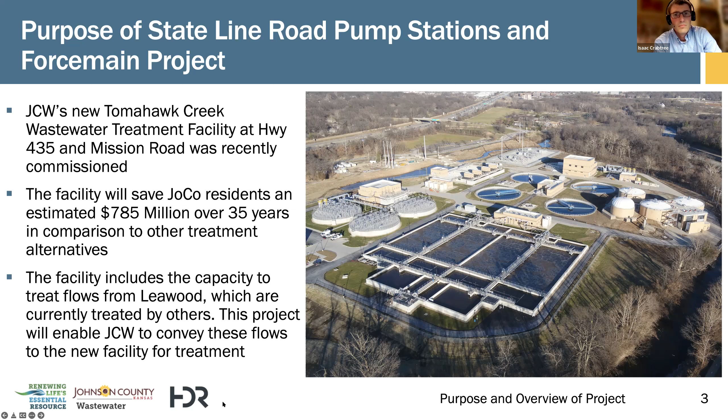So I'll get into this in a minute, but this project is going to end up intercepting flows at those locations, with the exception of number 12, and pump flows from there down to our new treatment plant, so that we're no longer sending dry weather flow to Kansas City, Missouri.

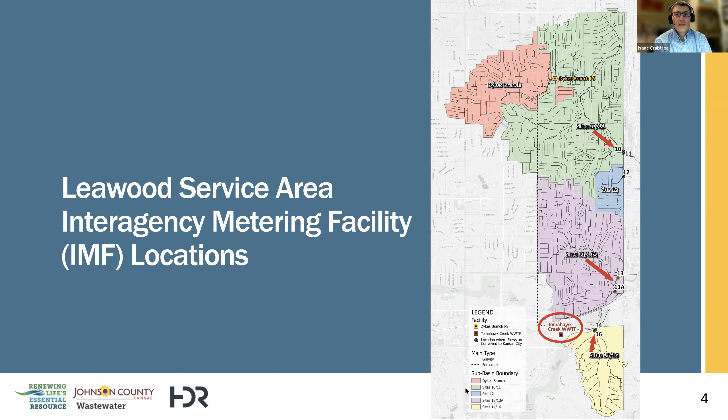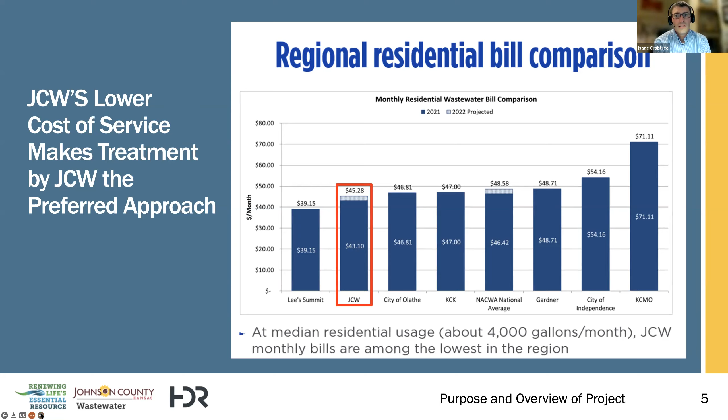It's not by accident that we have low rates. We have been proactively seeking out projects like this to save our ratepayers money, and that's one of the reasons why we can keep our bills as low as they are. If you want to go to the next slide, in actually looking at these particular pump stations, we're projecting that over the next 20 years we can save around $100 million by disconnecting those IMF sites and pumping the flow to our new treatment plant.

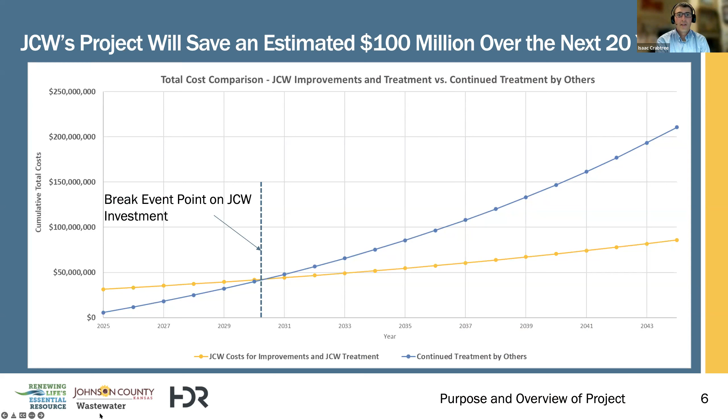And it will collect sewage from the sewers that cross under the state line at that point, and it'll pump it down a force main that goes along State Line Road down to 103rd Street, where it'll intercept flows from that pump station that we're going to be talking about tonight, which is, like I said, south of Gates Barbecue, just north of Indian Creek. And then together, those force mains will be combined and will be pumped across 435 through Leawood City Park, and eventually onto the Tomahawk Wastewater Treatment Facility.

There is one more pump station, the pump station 14/16, which is just to the south of College, right next to the Hallbrook Golf Course. There's a restroom facility that you may be familiar with if you're familiar with the golf course, between holes 18 and 16, I believe. That pump station will take flow from Hallbrook and pump it into the same force main with the others to the treatment plant.

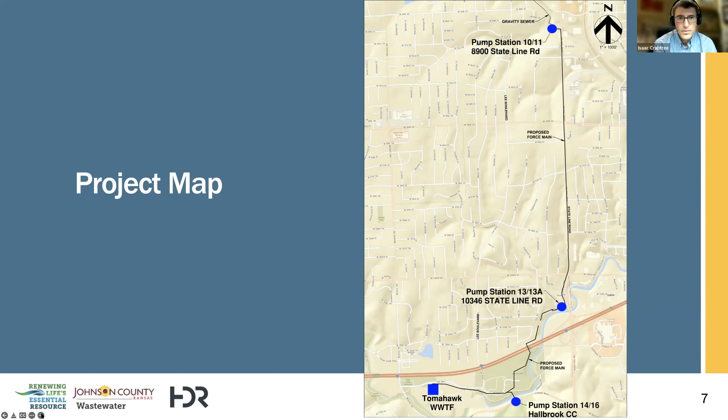So that's kind of a general overview. We've got 3 pump stations, we've got a force main, and all of it will take dry weather flow to the Tomahawk treatment facility there just to the west of the park. I think that was all I was going to present. I'll hand it over to Ron. Ron's going to go through some more of the technical aspects of the pump station.

Right, thanks, Isaac. Yeah, so I guess the question would be, why are we here tonight? And like Isaac was discussing, we've got this big project coming down here on State Line Road. We got this pump station that we're proposing. We have made a submittal to the city of Leawood, a preliminary development plan. So we've developed a concept to move this forward, to eventually go into final design once we get approval through the city.

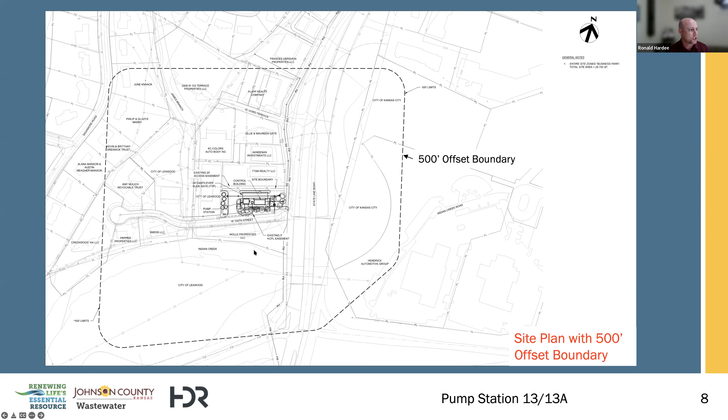As part of that process, we are required to do an interact meeting to reach out to the public, gather any comments or questions and get those addressed prior to the Planning Commission meeting, which will be on March 22nd. And so we've highlighted here on a site plan, we have to reach out to 500 feet beyond the boundary of the site itself.

And as Isaac noted, kind of the key location marker for this site is the Gates Barbecue. And then we're just north of the Indian Creek and the old Leawood Public Works facility. And there's actually an existing building at this site, and we will be demoing that building and constructing this new facility. So next slide.

Well, and Ron, I'm going to interrupt you just for a second. We got a question from Lewis. Yes. Mr. Nerman wanted to know what the taxpayers paid to construct the plant at Tomahawk, kind of going back to Tomahawk there. What did the taxpayers pay for the construction of the Tomahawk facility? That actually might be a better question for Mr. Kalis if he's on the phone.

I didn't work on that project, me personally. It's a Johnson County project. Was it around 250 million construction cost, Mike? We may have lost Mike. I think it was around $250 million. I'm here, Isaac. I couldn't find the unmute button.

Okay, sorry. First of all, the taxpayers paid $0. It was all financed through sewer rates. The total project was about $340 million. The construction of the plant itself was $260 million. And you may have noticed if you drive by, they actually had to fund the construction of an Evergy substation next to it to not only provide the plant, but strengthen the whole electric grid down through that area. And the rest were other associated costs for engineering and administrative costs and so forth, but 340 million in all out of sewer revenues.

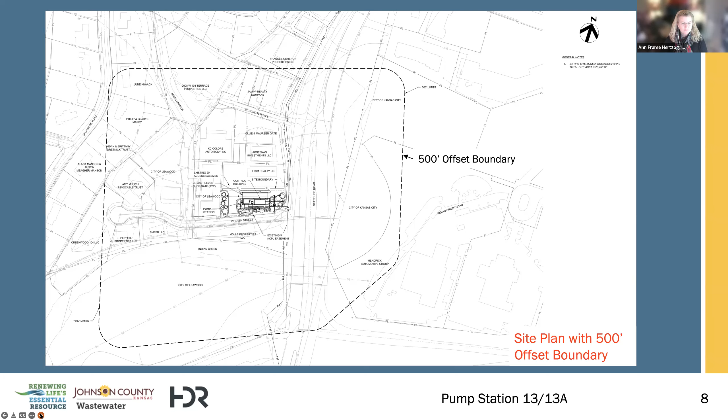Okay. So then this just shows a blown up view of the pump station site itself. So this property, we'll be platting it along with the preliminary development plan. The pump station building itself will sit 40 feet off of the right-of-way line, meeting all the city setback criteria. And then we're just trying to show at grade, the control building and pump station will be all you'll see at grade. There'll be a screening wall that you can see from 104th Street. We'll have a rendered image that will show the site as well at the end here, but trying to get a little more into the technical side.

So we'll have to reroute some gravity sewer lines in this area to get them over to the pump station. Then once it goes through the pump station, it will have a little force main that will tie into that larger force main that Isaac was noting coming from the north, heading on down to the south and west to the Tomahawk facility. And then there's some other lines in here. We'll be collecting stormwater and tying that into an existing collection system, which discharges into Indian Creek. That kind of highlights that for the time being.

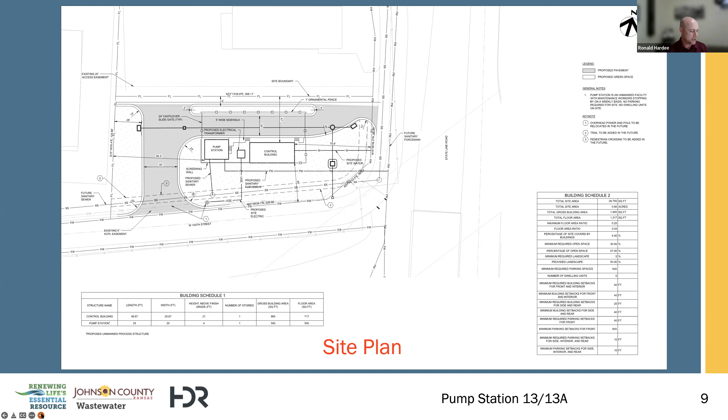The other thing, there's some table of information that the city requires, which just summarizes the building footprint. This isn't a manned facility, so there's no parking. So the only vehicle traffic you'll see around here is just maybe a couple times a week, some maintenance crews coming through. And then if there's a wet weather type event, there may be some routine maintenance and some jetvac trucks that come through this area. So next slide.

So as part of this development plan, we have to develop landscaping. The city has very in-depth landscaping requirements for new developments. And so as part of this, we're installing quite a bit of trees, and along the north side, we've got a grass island to separate us from the Midas facility. And they've requested some additional screening within that island.

And then as well in the middle, between the pump station and the building itself, we've got an electrical transformer, and it's got to be elevated up because of the 100-year flood in Indian Creek in this area. So they've asked us to plant some additional evergreens for screening beyond the screening wall that we'd be constructing here. So next slide.

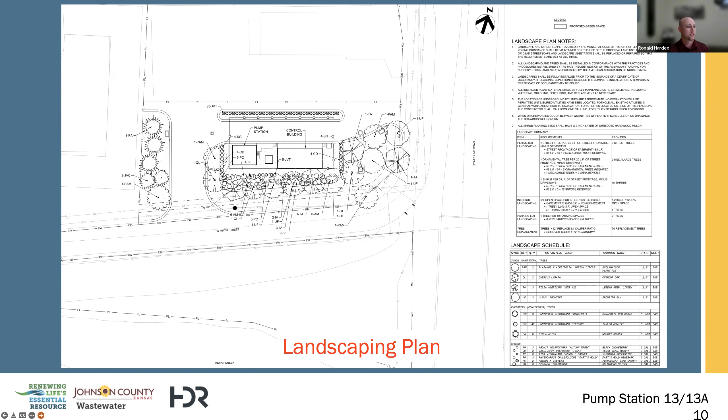Then the final odor control facility we have specific for the pump station itself is a carbon scrubber unit that's inside. That's basically just a screening wall, open top with a carbon scrubber inside, and that has a blower fan in it. So that will suck the air out of the pump station, push it through the carbon media, and release it to the atmosphere, removing the odors. Next slide.

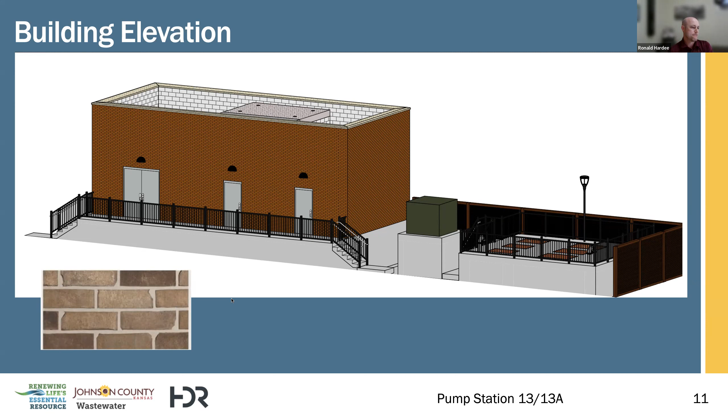I might have covered a lot of this next slide with that discussion. Capacity on this pump station is 1.8 million gallons per day, with 3 25-horsepower pumps - I believe that's 2 firm, 1 standby pump. Odor control was the liquid chemical treatment, that bioxide, and then we have the vapor phase carbon scrubber treatment.

As for noise, the pumps are submersible underneath the sanitary sewer flow, so you'd have to put your ear up against the hatches to actually hear any noise from the pumps themselves. The only noise that may be somewhat audible at the site is the blower for the carbon scrubber, but that'll be in a sound dampening enclosure, and that will meet all the city's requirements for decibel levels at the property lines.

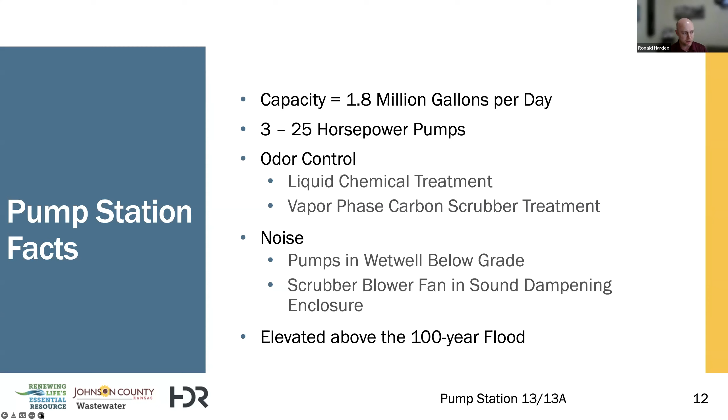Again, I mentioned the Indian Creek floodplain, so we have to elevate that 2 feet above the 100-year base flood elevation to meet the city's requirements. So this will have a slight elevation - that's why we had the steps out in front, so we could keep that elevated and protected from the 100-year flood. Next slide.

As part of our initial process evaluating the site, whether it's practical or not, we've reached out to several agencies. We've reached out to the Kansas Department of Agriculture, Division of Water Resources - another floodplain permitting perspective - and they noted that the project is acceptable to them. We also reached out to U.S. Fish and Wildlife, to check whether we'd endanger any threatened or endangered species. For State Historic Preservation, since Indian Creek is within a developed site, we don't have any perspective issues from historical activities at this site. Then the Army Corps of Engineers.

Then we got Kansas Department of Wildlife, Parks and Tourism, and then just KDHE from a land disturbance perspective. Next.

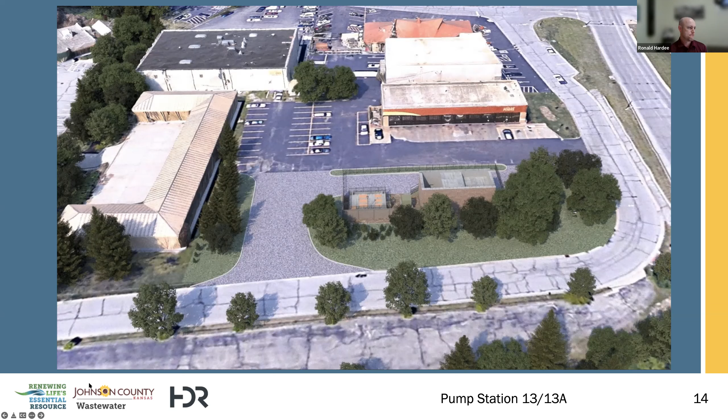And I'll turn it back over to Isaac here to talk about the steps moving forward. Great, thanks, Ron.

Wanted to go through a schedule real fast before we get to some questions. The next step after these Interact meetings this week is the public hearing at the Planning Commission, City of Leawood. That's taking place on March 22nd. If you have any questions or comments, you can send them to that email address, planning@leawood.org, and those will eventually make their way to us. You can also contact me directly - if you received a postcard or a letter in the mail, it should have my contact information on that.

Beyond the planning development process with the City of Leawood, the next step really is moving into detailed design. So HDR has done a fantastic job bringing us to this point in our conceptual design, but we will actually be selecting a new engineer to move forward with because they're our program manager. They'll still be loosely involved, but we'll actually have a different consultant on board for detailed design. So we'll actually start that selection process here fairly shortly, and they'll be on board sometime this summer.

And so design will take approximately 11 months or thereabouts. And so summer of 2023, we'll be looking to bid the project and awarding that to a contractor by the fall of 2023. Usually it takes 3 or 4 months to get them on board after getting bids. So construction is slated to start fall of 2023, and construction duration is approximately 11 months to a year. So pump station in service November 2024 is what we're targeting right now.

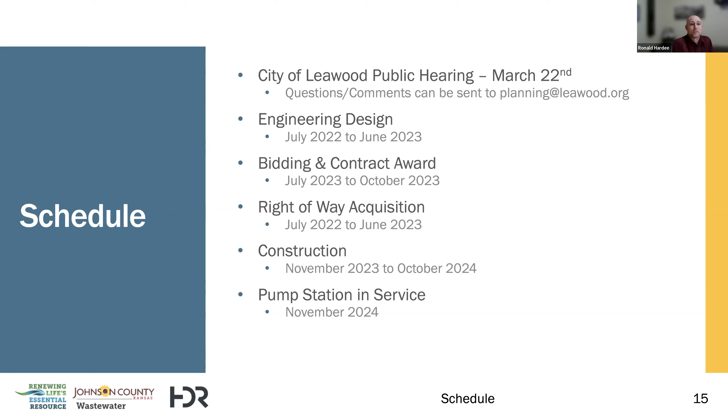Okay, thank you very much for your evening and your presentation. Thank you. Thank you. Have a good evening.